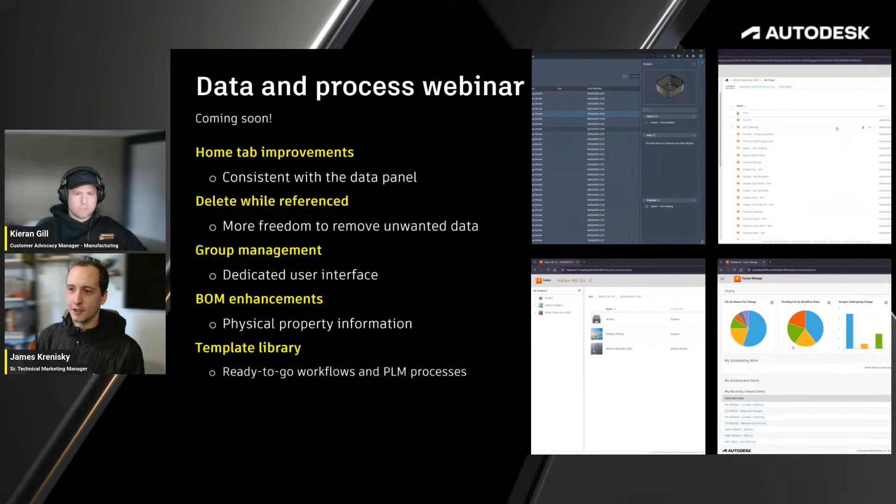Alrighty. So next slide, if you don't mind. I just wanted to say on this release, the highlights are really in consumer product design, multi-axis machining, and multidisciplinary collaboration. There's quite a few updates that aren't going to make it in this presentation or didn't make it in the What's New video. The blog contains all of the release notes, and I highly recommend checking that out. I know there's some updates in electronics that we're not going to get to today that are fantastic and incredibly impactful for a lot of y'all using the electronics workspace.

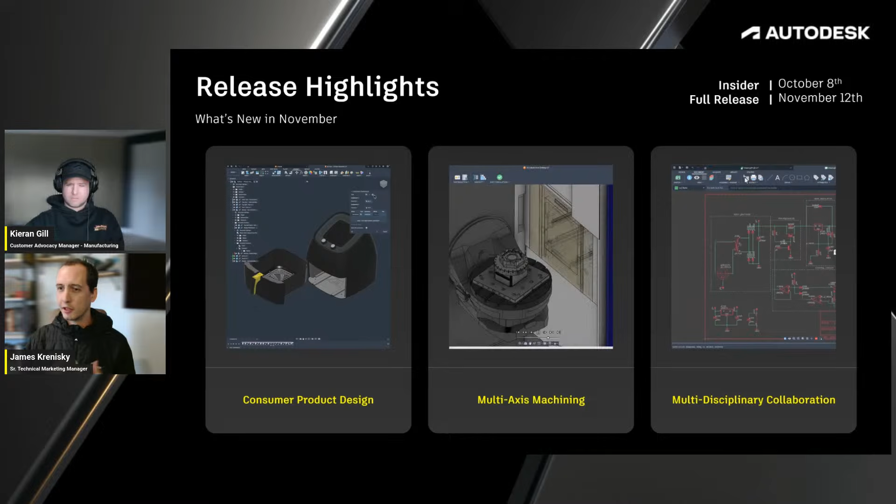But I also just wanted to mention this as a theme more than anything. So you'll see updates in the design side, for instance, on things that help you consumer product designers out there. We really tried to make a focus of adding features that are relevant and impactful for workflows for consumer products this time around.

And speaking of, I just wanted to say this air fryer dataset made its debut maybe a year ago, but we had it on main stage at Autodesk University. We went ahead and took that time to improve it. We added a lot of detailing. We changed the PCB design. We even made a mold design for it, you might have seen.

But I just wanted to put it up here as a flag of we've now uploaded that to the samples folder. So if you want to take a look at it, explore it, maybe critique it if you happen to be an air fryer manufacturer, we'd love to hear your comments. And those types of pieces of feedback really drive these features that we're developing. So let us know.

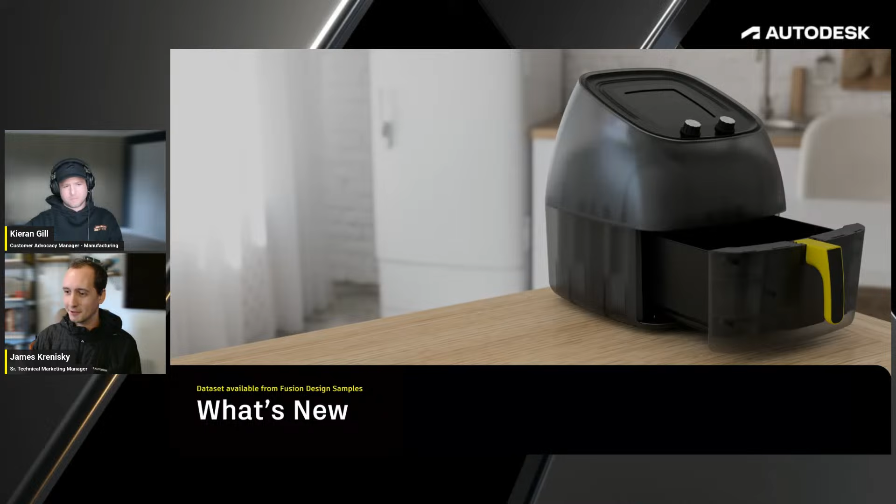Okay, so moving into my expertise, which is really on the design and documentation side. I try and leave Kieran to his manufacturing. I wanted to note something here on the intent-driven design, which I'm sure a lot of you have heard of from the Insider program. This is actually going into public preview later this week. So you'll be able to go into preferences and toggle this on. Everyone will. Later this week, there's going to be kind of a one-off update for some things on the data side, but we're going to include this as well.

And this is actually a really fundamental change slash experiment slash an ask that we've had from the community. It's basically allowing you to start a part, assembly or a hybrid design, which is more of what we imagine as the semi-traditional design style of Fusion. But we're trying this out. I will say it's going to come into full-blown release in some form probably at the beginning of next year sometime. But go check this out. Let us know what you think. And we're actively developing this.

I think it's going to help a lot of users that switch between programs. Like I use Inventor a lot, and I'll sometimes pop into Fusion and I'll say, oh, wait, I didn't make an assembly design because I don't need to. It's just one of those things that if you're bouncing between CAD systems, or I know a lot of you use SolidWorks at work or Fusion at home or vice versa, we're trying to make it easier to transition between. And also it's something that's highly requested and it's been incredibly well received. So all that rambling to say this is coming out later this year or later next year, and to check it out in public preview if you would like to try it out.

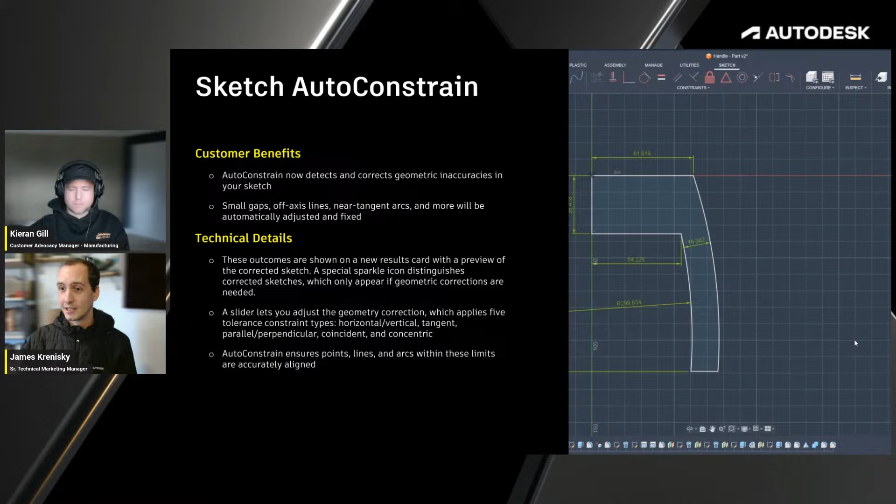Okay, so we're starting off with Sketch AutoConstrain. This has been out for a while now. It's one of the Autodesk AI tools that we know and love, but there's a huge update to it that we're sliding in here, and it's the ability for those sketches to actually be healed. It corrects them. So when you draw a sketch and it's not quite perfect, maybe you have a missing tangent or perpendicular constraint, or maybe there's a gap between the corner points of a sketch, there's a little sparkling icon that you can open up in the AutoConstrain menu and then actually just set it to fix your sketch. So it's like auto constrain gets auto fixing.

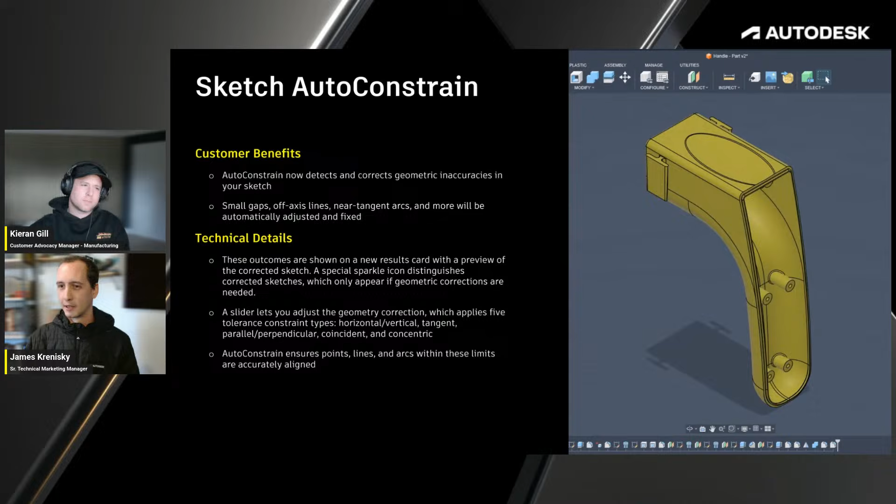And there's tolerances you can add if you don't want it to be, a certain degree of draft angles or something. You don't want it breaking all your draft angles and making them horizontal, vertical pieces. So definitely go check that out. It's really impactful for just speeding up your sketches. If you're like me, I kind of just sketch as I brain dump. So it's helpful to have something to go back and add all those constraints so downstream workflows don't get changed later.

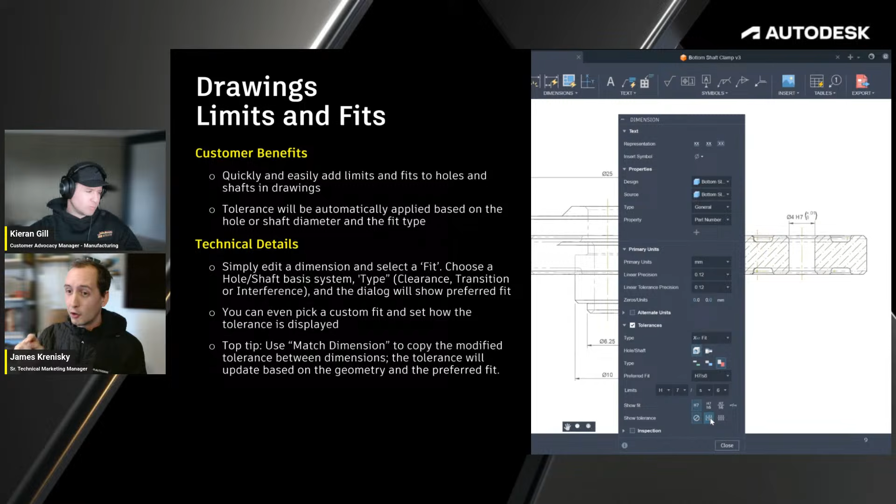I didn't get to fit this one into the YouTube video, so I slid it in here. This is drawing limits and fits, which is amazing. It's pretty advanced for adding tolerances. So like H7 or G6, if you have that precise fitment. My favorite part about this, though, is actually way down the list. And it's almost like a formatter, kind of like the paint tool in PowerPoint or any Microsoft product, I think, where you can format the actual style of that annotation and then put it onto another.

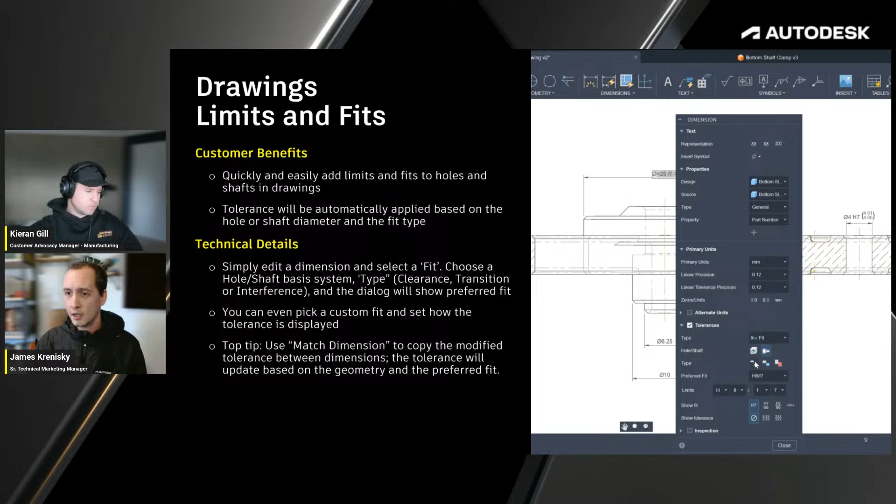So it won't take the exact values like a copy paste, but it will take the formatting, the designations and such, and add all of that to the next one. So definitely check this out. It's really powerful, and I know a lot of folks have also been asking for this. It'll just make your whole documentation a lot more accurate and specific and reusable.

I pattern things all day long, so all of my sketches are atrocious. But I would highly recommend checking this out and let us know what you think. There's performance improvements in every single release of Fusion, and it's something we focus on constantly. But it's hard to make a flashy video for all of these performance improvements. So like I said, I just wanted to sneak it in here because it is really impressive how much they improved this one.

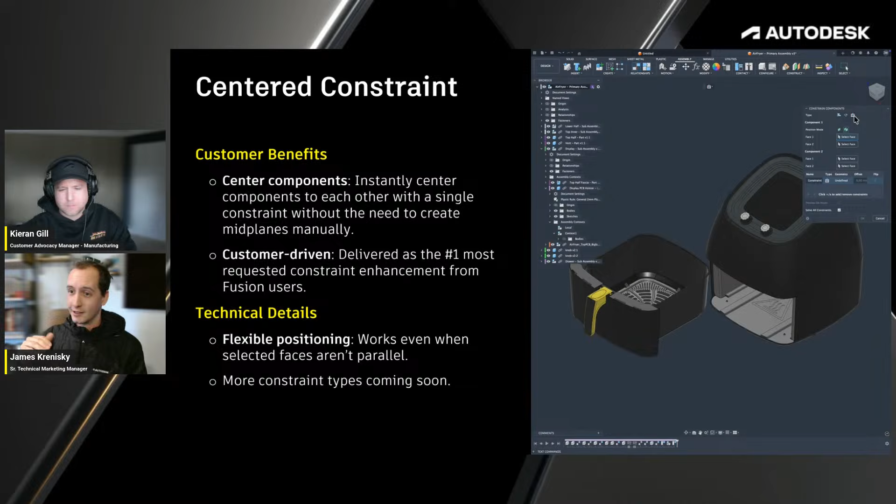So even though this air fryer has draft angles and I think the body is pretty rounded, it has all these kind of strange geometry features, Fusion figures that out for you. And so it'll slap together pretty much exactly what you would imagine. And then using the new constraint assembly experience, you can really just keep on adding until it's perfectly constrained all in one timeline command. I think we all like a tidy timeline, and this is a huge step into that.

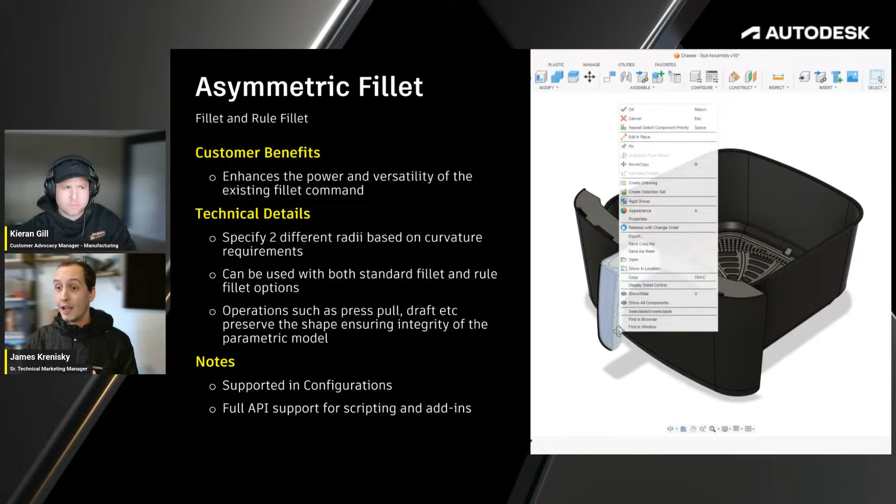Asymmetric fillet. So speaking of consumer products, this is one that's been on the list for ages. This is basically exactly what it sounds like. You can create fillets now, kind of like how the chamfer tool has multiple dimensions. Your fillets can have multiple dimensions, and it gives you a ton of flexibility for how you can actually apply fillets to different edges or faces and what have you.

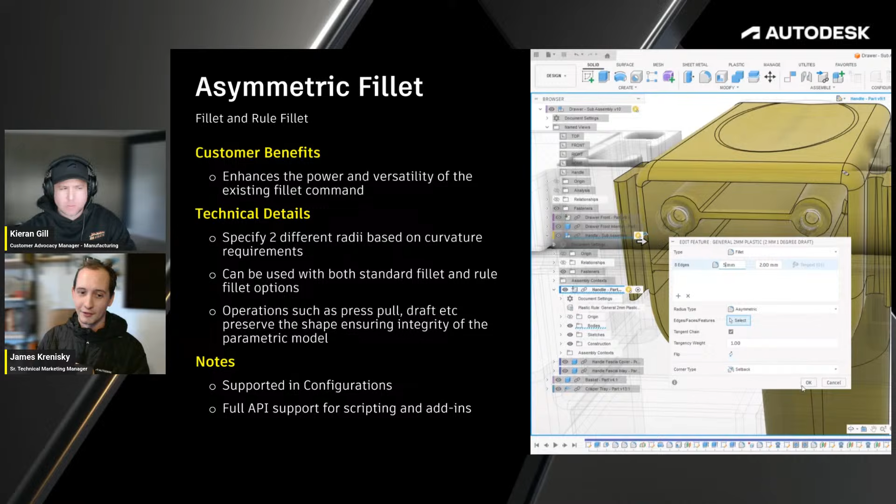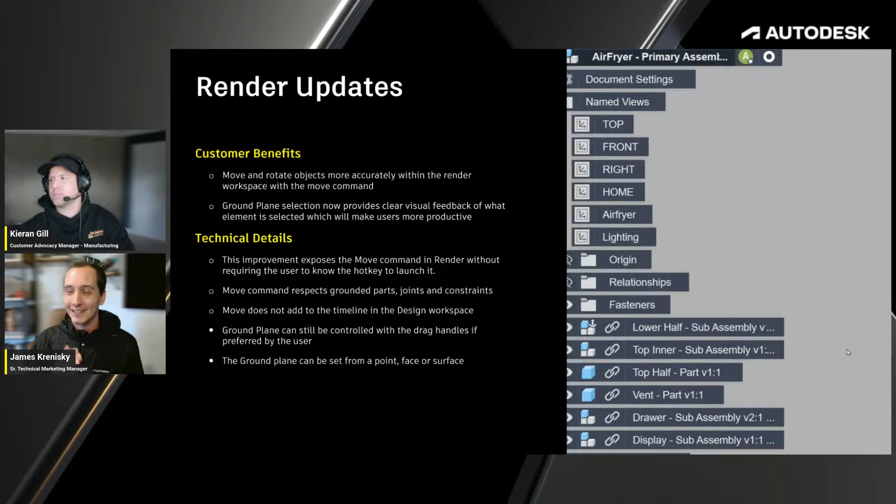Rendering updates. We finally got some great rendering updates for Fusion this release, and I didn't get a chance to sneak it in. The rendering environment in Fusion doesn't get a lot of attention, so we're trying to change that with these next few releases. This is something that's very fundamental, but super helpful if you're doing renders. You can just move those components without needing to move back into the design space. So it's actually incredibly cool to be able to have your shadows and your lighting fall how you would expect.

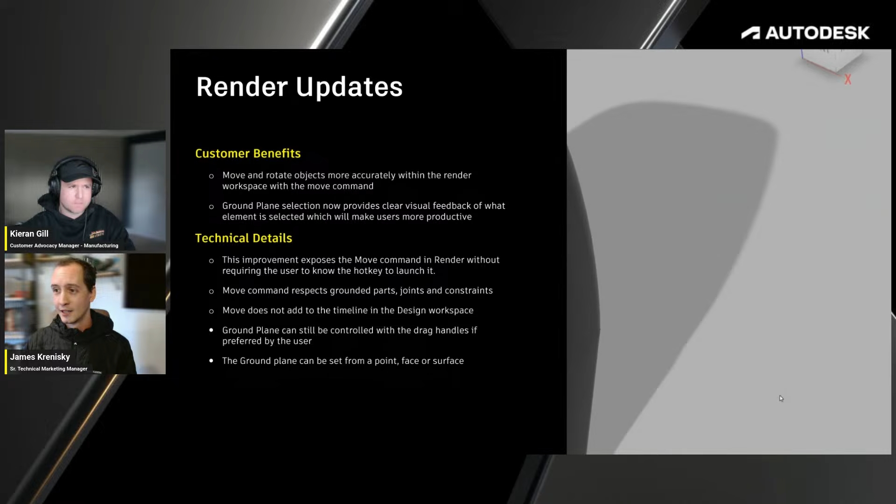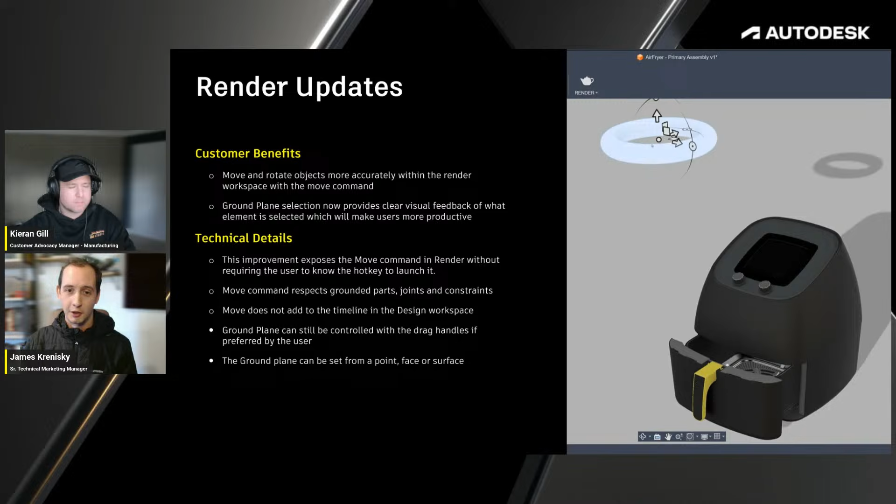A pro tip somebody told me, perhaps James Mann, if you're listening, I think you told me, is to add a gap right between the ground plane and the object, and it makes the shadows beautiful now. So really great to see that. There were some other ground plane improvements that came along with this. So I'm not sure if that has anything to do with it, but that little tip has changed my rendering from very basic to quite advanced looking.

Okay, decal updates. So decals are one of those things in Fusion you either use a ton of or you don't use it. And this is an update for y'all to start using decals in any way that you can, because the improvements are just fantastic this release. The sizing of the decals has been updated to a better interface. You can definitely restretch it to how you need.

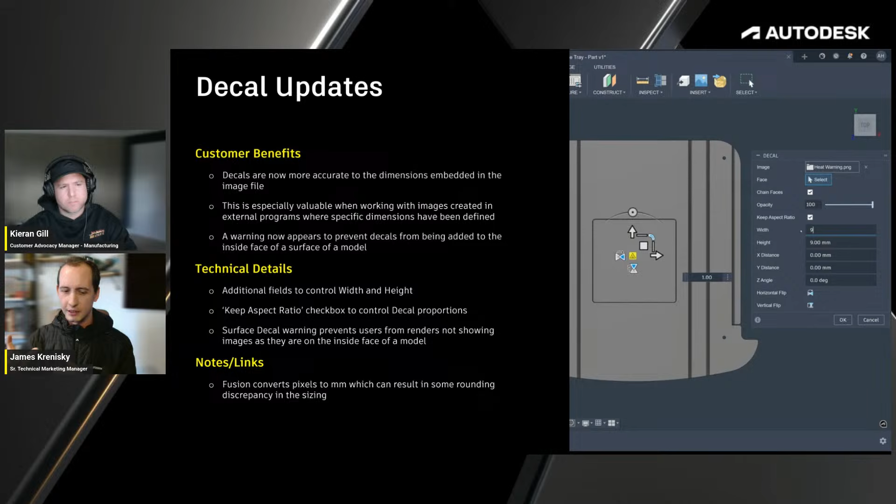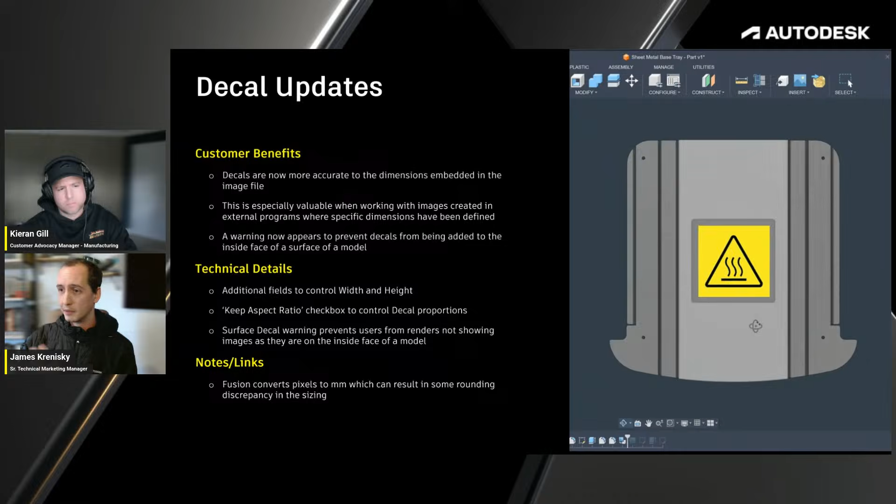And I'll say that sometimes there were some issues with the pixel count coming in. So if you had it at 10 millimeter by 10 millimeter and you brought it in, it wouldn't come in that dimension. So we've resolved that. And if it doesn't for any reason, it can be stretched as needed. I will say there are some rounding anomalies that you should definitely check as well.

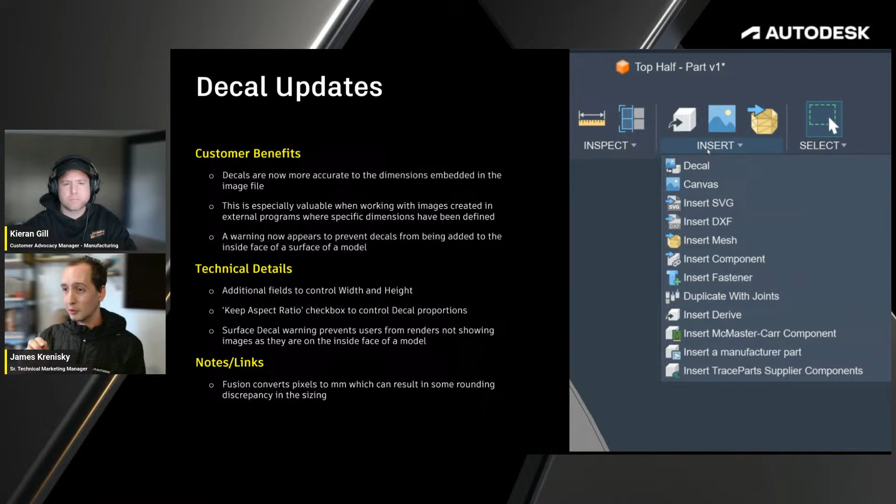And then the big update for this decal tool is that it now notifies you if you accidentally put your decal on the inner face. So it's easy to apply a decal, even though it appears oriented correctly, to basically the incorrect face. So if you go to render it or create documentation, this is kind of a game breaker. So this update allows you to know exactly what face you're putting those on and convert it correctly.

I'm sorry if I'm speeding through these. We had a lot of them, and I know Kieran has a bunch as well.

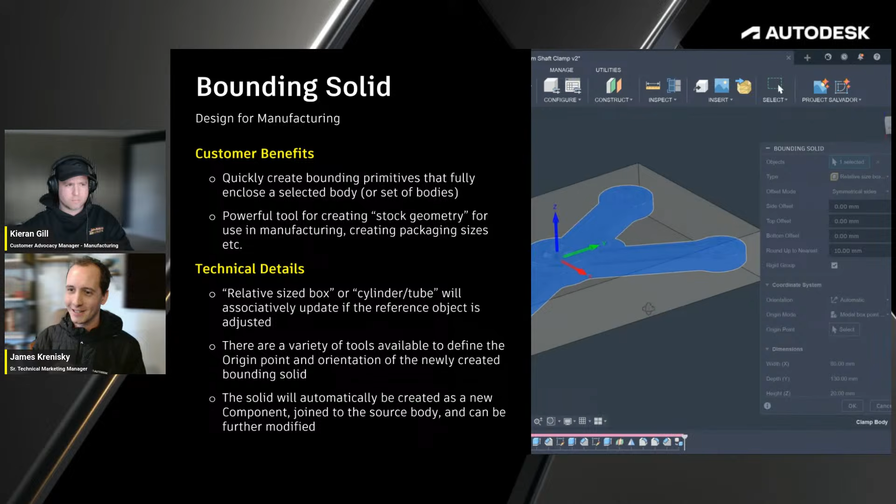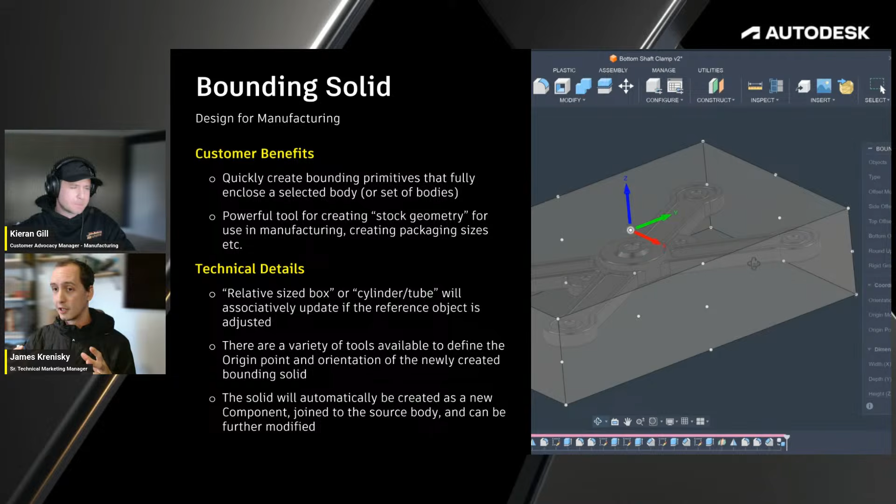So bounding solids. This is one of those that is a great bridge between manufacturing and the design space, but you can quickly create those bounding boxes. It fully encloses your selected bodies, but also creates that timeline feature, so you can go back and do parametric changes. This is cylinder and rectangular prism basically now. It associatively updates, and it can be used on a set of objects as well as an individual one. So definitely give this a try.

I know a lot of you have stock, which you can use this tool for, and that stock can also be edited with different features. So if you're fitting it into a vise or some type of machine specifically, you can add those features into that body as well.

And I think that might be my last feature before I hand it over to Kieran. Sorry if I flew through that. Let me know if there's any other questions in the comments there. Super duper. Thank you, James. Can everyone hear me okay? Super. Yep, sounds great. Great.

So let's focus on manufacturing. We've got a lot to get through. I've actually got a few demonstrations I would like to walk you through in Fusion as well. So let's jump straight in. Now, the first one really for the November release is what we are calling a user coordinate system, or UCS. The UCS is a general tool for defining coordinate systems in Fusion, particularly for horizontal end-to-end workflows using other workspaces as well as design.

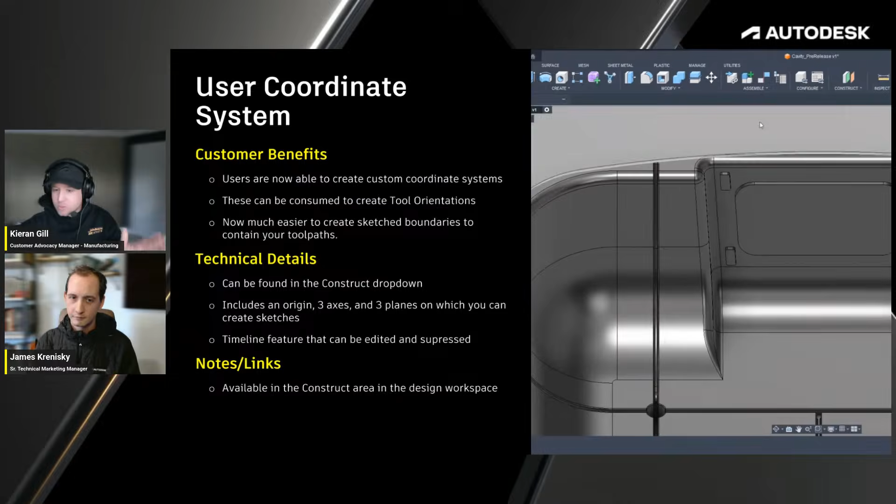Now, the common application for this bit of technology is for 5-axis machining, where you may need to define a tool orientation and sketch a 2D toolpath boundary aligned with that tool orientation. Previously, this has been difficult, cumbersome, and problematic, but you can now use the design workspace to very easily create a user coordinate system and use the XY reference plane to create a sketch.

Now, within the manufacturing workspace, you can consume that UCS to define any tool orientation and select the sketch to define the toolpath boundary. It's never been easier, and the video really gives you a good idea of what that capability looks like, but also the power of that capability and what it brings going forward to the manufacturing environment.

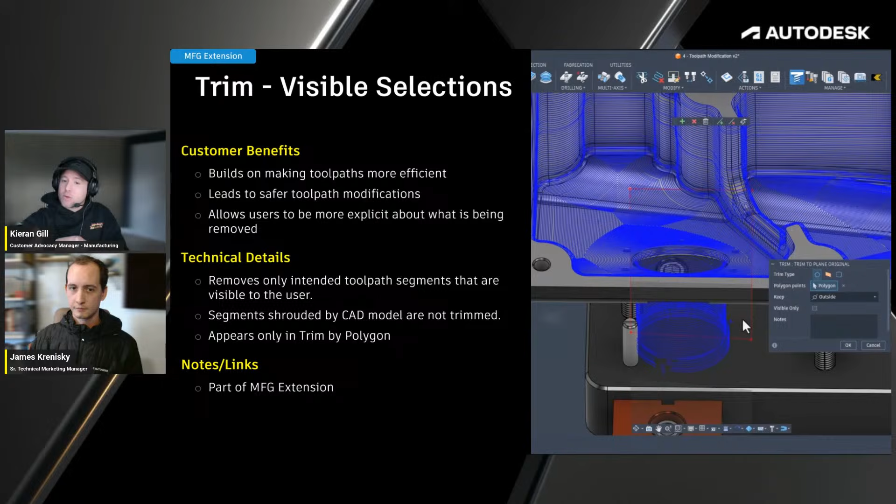Okay, then on to trimming of visible selections. Now, part of the problem when applying the trim modifications to toolpaths using a polygon, using the Manufacturing Extension, meant that toolpaths on the other side of a bit of geometry could often get caught by the cookie cutter effect. So you not only trim the area you want, but you also unknowingly trim other portions of your toolpath, making for potentially dangerous cutting conditions.

So not ideal. So with the November update, you can now choose to project the polygon onto the nearby surface instead of through the entire part. In this projection, only the visible selections of the toolpath within the polygon are considered to be quote unquote inside, and the rest of the toolpath is considered outside.

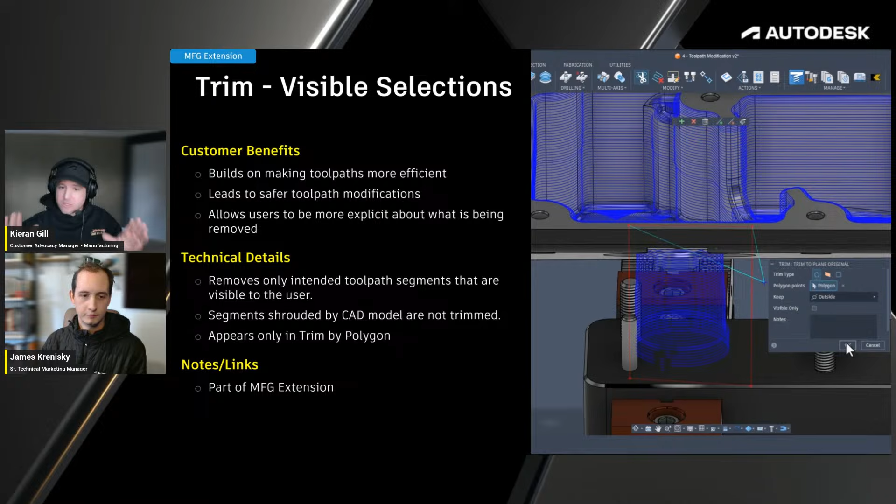This makes it far easier to make modifications more precisely, making changes where they are required more explicitly and avoiding changes elsewhere. All you simply need to do is check the visible areas only checkbox to make sure you are not trimming the wrong bits of your toolpath.

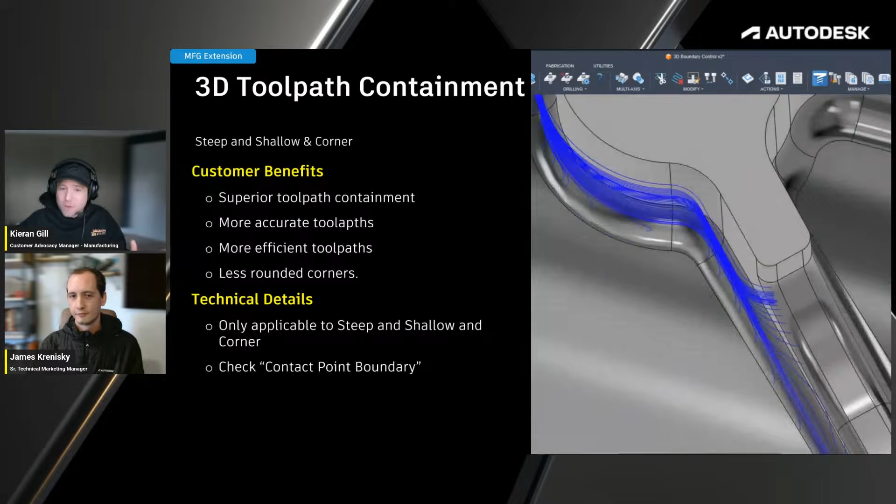Okay, then onto 3D toolpath containment. Now, have you ever wondered why sometimes steep and shallow and corner would sometimes bleed outside of the boundary that you created? Well, to give you a bit of context here, the real reason lies in how the toolpaths were consuming boundaries.

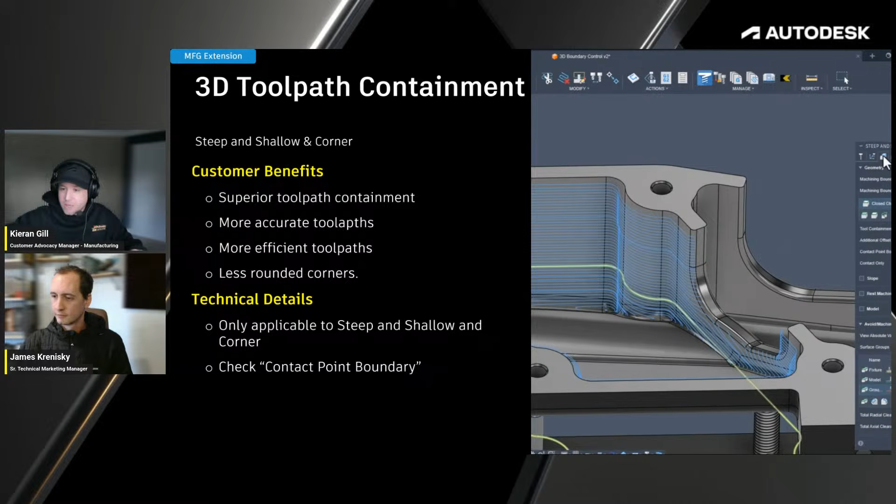Essentially, what's going on is that due to the nature of those toolpaths being born from PowerMill, they have always enjoyed the ability to consume 3D boundaries. Bringing that tech into Fusion meant that we had to essentially flatten the 3D boundary into a 2D boundary. This meant a less than ideal situation where the toolpath would sometimes bleed out of that boundary, especially when you had steps in vertical orientations, for example, which 2D boundaries just didn't deal with as well.

So that's all changed with the November release. When using the steep and shallow or corner strategy now, the toolpath is confined on vertical surfaces much more accurately when using the machining boundary selection as a contact point boundary. You will now also see that when checking the contact point boundary, the boundary stays in 3D now and respects those vertical areas much more accurately.

Ultimately, what does this all mean for customers and yourselves? It simply means there's less tool rollover on defined boundaries, more accurate toolpath containment, and just a much more accurate toolpath going forwards.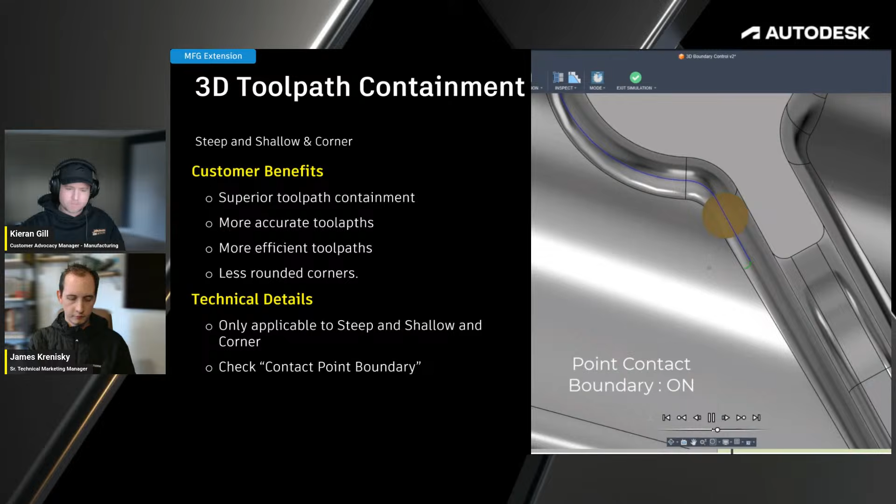Okay, so multi-axis drilling. This is a pretty big one. If you haven't already guessed it, we've added multi-axis capabilities to drilling operations, exposing the multi-axis tab with 3 new machining types to drilling. Those are polar, 4-axis, and 5-axis. So there's quite a lot to unpack here, so if you do want to take notes, feel free to do so.

With respect to polar, what this does is it adds polar linking functionality to the drilling operations while maintaining cycle output for the cutting moves. This can enable you to stay within those machining limits where necessary.

On 4-axis drilling, the controls allow you to define a rotary axis whereby the holes to be machined will generally be perpendicular to the rotational axis. You also have controls to specify whether the hole axis should intersect with the rotary axis, for example on holes on a cylinder, or whether they can be shifted in the perpendicular plane. A good example here would be holes on a cuboid shape around a rotary axis.

And additionally, there is also a control to specify a tilt angle, in which case the machined holes will be tilted away from the plane perpendicular to the rotary axis in a 4+1 fashion.

Now, lastly, in 5-axis, the operation will machine the holes in full 5-axis, respecting the axis limits defined. You can apply a maximum as well as a minimum tilt angle with respect to a tool axis reference, as is common in other multi-axis milling strategies today, of course.

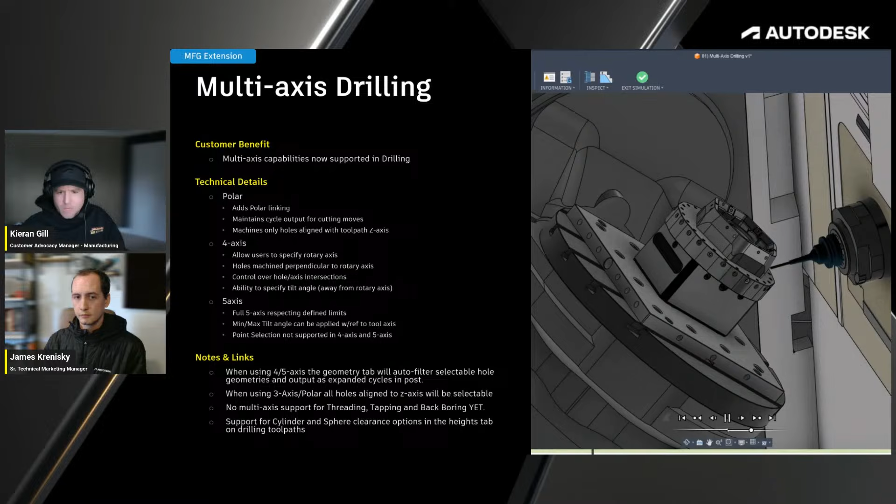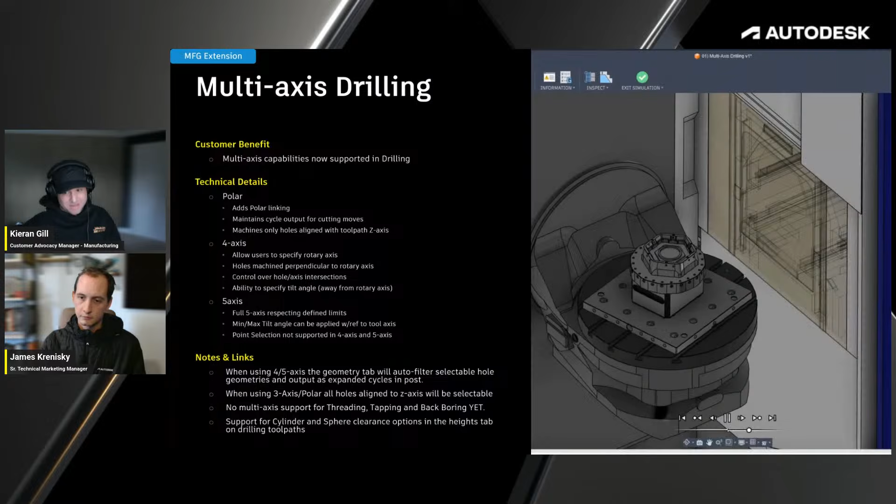And then probably the big call out here is that all toolpaths with machining types set to 4 and 5 axis will be output as expanded cycles in the post rather than canned cycles. What this means is that there is no direct synchronization between the spindle and the feed rate. So ultimately, things like threading and tapping operations do not yet have multi-axis support. And I mean yet. Similarly, back boring does not have multi-axis support yet either.

Okay, so let's move on to machine over holes or pockets now, and we'll dive into a demonstration of this very shortly. Up until now, the ability to machine over holes and pockets was only supported realistically by geodesic toolpaths and flat toolpaths through a tick box on the passes tab.

Users have been able to get around that by creating capping surfaces and including them in their machine avoid selections for all other toolpaths. This functionality, as I mentioned, is supported currently in geodesic and flat, and we've now extended that to work for all 3D toolpaths that support machine avoid capabilities.

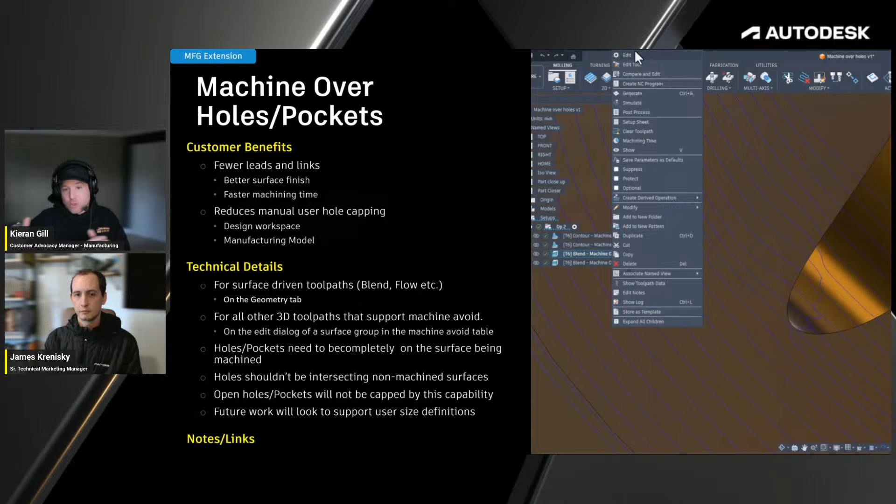Now, how you access this capability is slightly different depending on the toolpath you are using, so it's probably worth paying attention to this. For surface-driven toolpaths, things like blend, flow, geodesic, the tick box can be found on the geometry tab in the geometry section. For all other toolpaths, it's found on the edit form of a surface group in the machine avoid surfaces table. So ultimately, slightly different access methods, just something to be aware of there.

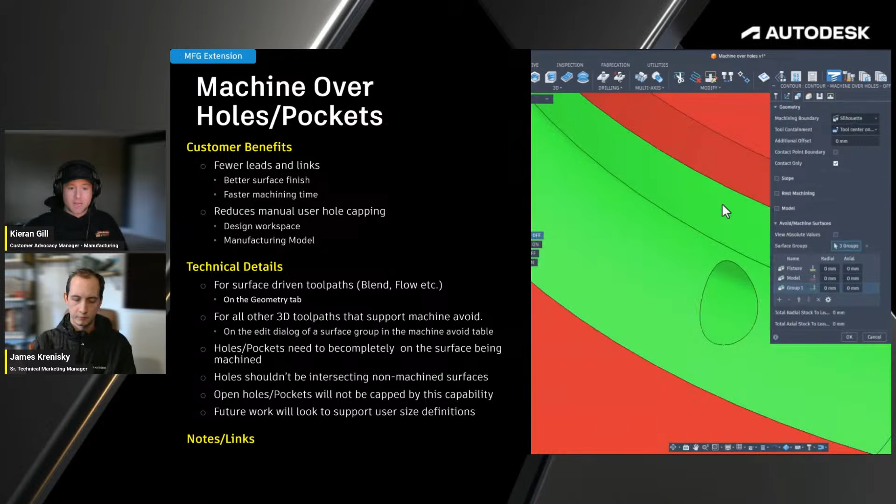Ticking the box, however, in both cases means that all surfaces in the surface group or the drive surface group will be automatically capped or untrimmed behind the scenes. And that means that any holes or pockets in these surfaces will automatically be machined over by the toolpath without the need for the user to go in and create additional capping surfaces downstream or upstream. So some real powerful workflows there to help you automate these toolpaths from ducking into those unnecessary holes.

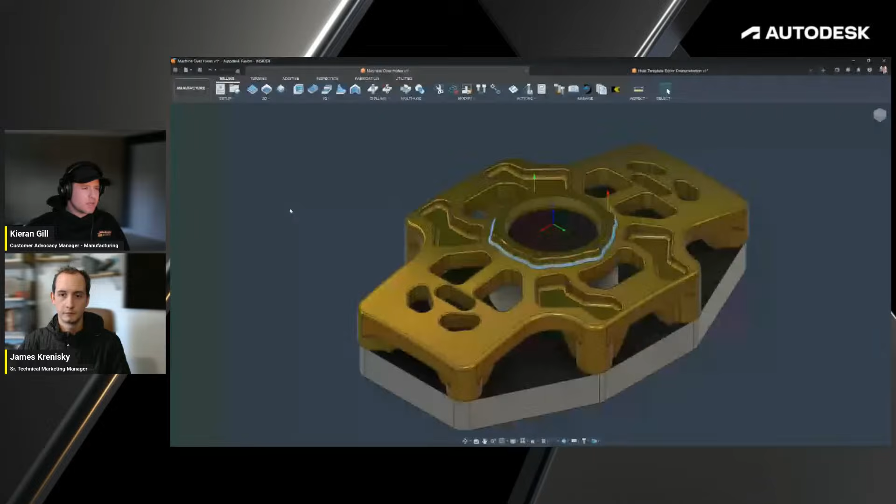Okay, so with that, let's just stop sharing for a minute, and I will share Fusion. So I shall stop sharing and I'll reshare my screen. We'll just have a look at what that looks like in practice. So let me just grab the right screen here for everyone. Can everyone see my Fusion screen at all? Yes. Okay, everyone can see the screen.

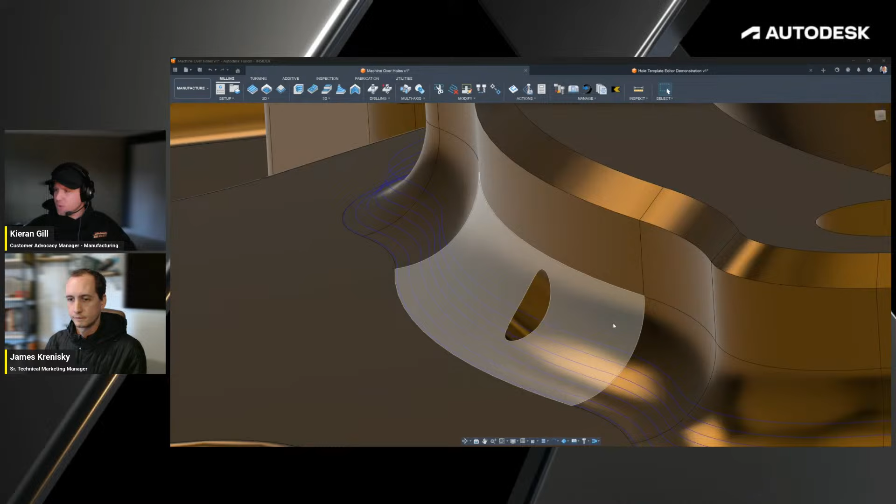Okay, so on the screen, we've got a simple part. Now, we've got two different toolpaths here. We've got a blend toolpath and a steep and shallow toolpath. Let's first look at the blend strategy and have a closer look at this. Now, on the surface of this, it looks as if the toolpath is actually looking quite good. But if I zoom in, you can actually see that the toolpath is ducking into that hole, creating unnecessary tool engagement in potentially a lot of stock.

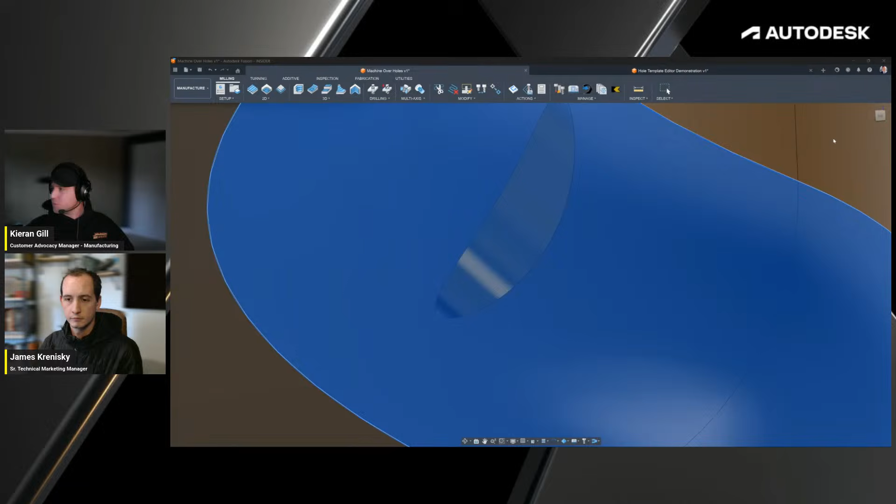This is potentially fatal for the tool, could damage the machine tool, and this is just something that we want to avoid. With the option turned on, you can see the toolpath just simply glides over that hole entirely. So for blend style toolpaths, which are surface driven toolpaths, the way you access the ability to machine over holes is to enable the machine over holes option within the geometry tab. Okay, so similarly, once that is activated, you can see the toolpath just simply avoids the hole.

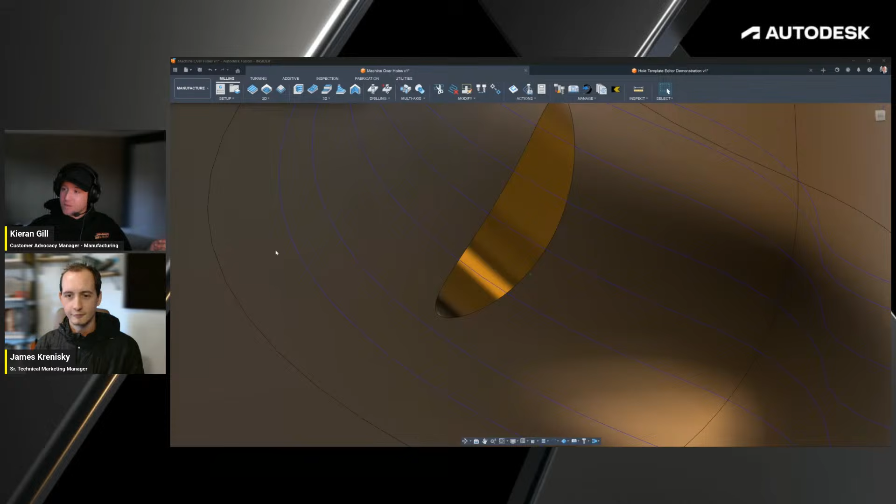Let's now look at steep and shallow. Now, again, an undesirable effect here of the toolpath ducking into that hole. You can clearly see the kink of that toolpath ducking into that hole. So this is obviously something we want to avoid. And again, let's turn that functionality on, and you can clearly see with steep and shallow how it just simply glides over that hole. Now, with steep and shallow, this is slightly differently accessed to some of the other toolpaths.

So for example, here in your machine avoid option, you can edit that machine avoid group. And within the actual faces that you are choosing to machine, you can enable the machine over holes functionality. So just to recap, two different methods for invoking machine over holes. For surface-based toolpaths like Blend, Flow, and Geodesic, you will access that from the Geometry tab. For other toolpaths, it is found on the surface group in the machine avoid table.

Okay, so I will quickly stop sharing again, and we'll just very quickly jump back into the presentation. So let's go over here. And let me know when you can see my screen.

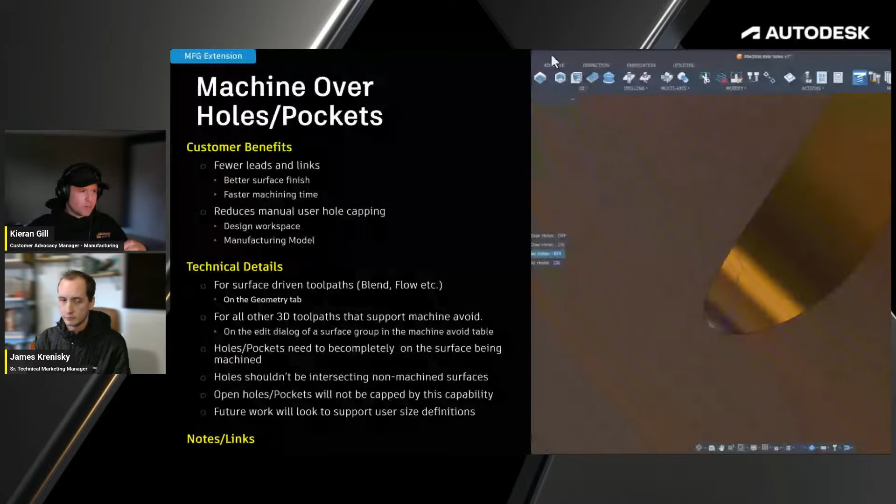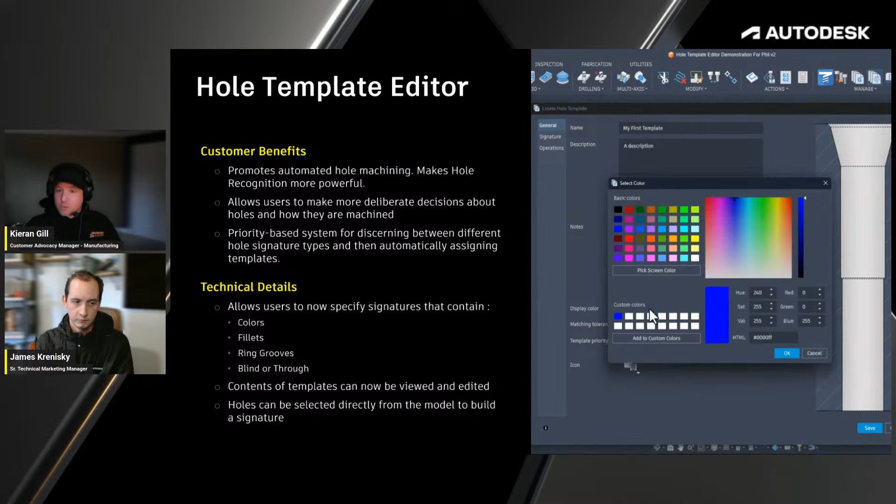Right, so that is machine over pockets. And let's now jump into the hole template editor. Now, I think this is pretty much a revelation in empowering you to automate your hole machining in Fusion going forwards. So you're probably thinking, but hang on, why is Autodesk introducing a hole template editor when we already have the ability to apply templates and we already have hole recognition? Well, there are five big problems why we are introducing the hole template editor. Bear with me as I go on a rant here to walk you through why we've done what we've done.

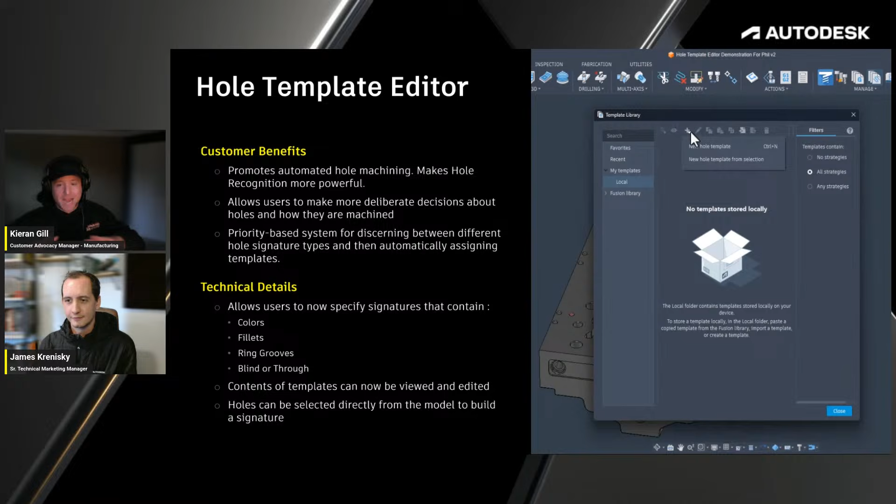The first problem is that hole recognition today has no concept of dimensional scrutiny for selecting a template. So imagine two counterbore holes, one very large and one very small. Hole recognition will recognize them both as a counterbore and show you all the templates that are associated to those counterbores. There's no concept of specifying templates based on the dimensions for any of those given features. The user still needs to hit the drop down and pick a template from the list.

It's not very automated. The second problem is that hole recognition templates only apply standard drilling to holes containing cylinders and cones. If that hole signature contains a fillet or even a groove ring for inserting something like an O-ring anywhere in that signature, you might as well throw all your hard-earned money into your nearest wishing well, because hole recognition sets the signature to ignore with no option to change it to anything else.

Generally, to get around this, holes that have fillets or anything else other than a cylinder or cone, you could simply delete the fillet from the CAD, create a template for your hole, and then drill with a much smaller drill and come ramping down the hole to add in that fillet later with something like a bull nose. Talk about a nightmare. So that's the second problem.

The third problem really is that most users will, generally speaking, import data from a third-party CAD software into Fusion as they transition over to Fusion. Now, the problem therein is that if it's a STEP file or a Parasolid file, we lose all the hole data like hole type, thread info, and tolerances. Now, designers often communicate what type of hole it is and how it should be manufactured. So sometimes the designer will purposefully create holes with incorrect dimensions so that it can be identified as a cooling channel, maybe a water channel, maybe even a sprue bush hole, whatever.

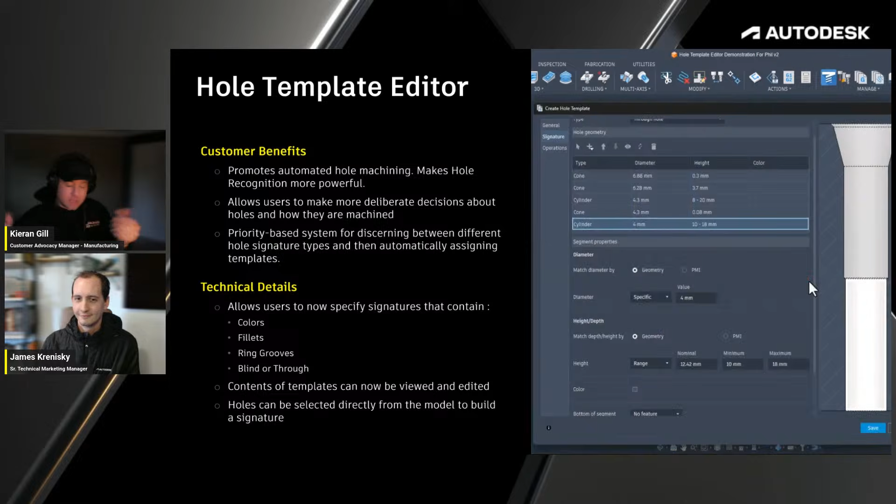Problem number 4 is hole recognition today contains the ability to apply templates and the idea that one can share those templates across the factory floor. Great in principle. You could share it across teams, across organizations, and it provides a nice comfort blanket so that conformity of accuracy is achieved when drilling is standardized across the company. Sounds all good in practice. Generally, it'll be the drilling guy, the drilling maestro, the drilling guru that simply creates the templates and sends them to all of the colleagues.

So today with hole recognition, when the colleague receives that file from the guru, all they have is a short name of that template. The template can't be looked at in any great detail. It can't be opened to see what toolpaths are inside that template, what settings are inside these toolpaths, or what decisions were made to help create that template in the first place. The only thing a colleague can really do is generate some dummy toolpaths from it and have a look at them. Essentially, users have been going on blind trust that the person who created the templates knew what they were doing. So call me cynical, call me glass half empty, but I'm not sure I trust that workflow myself.

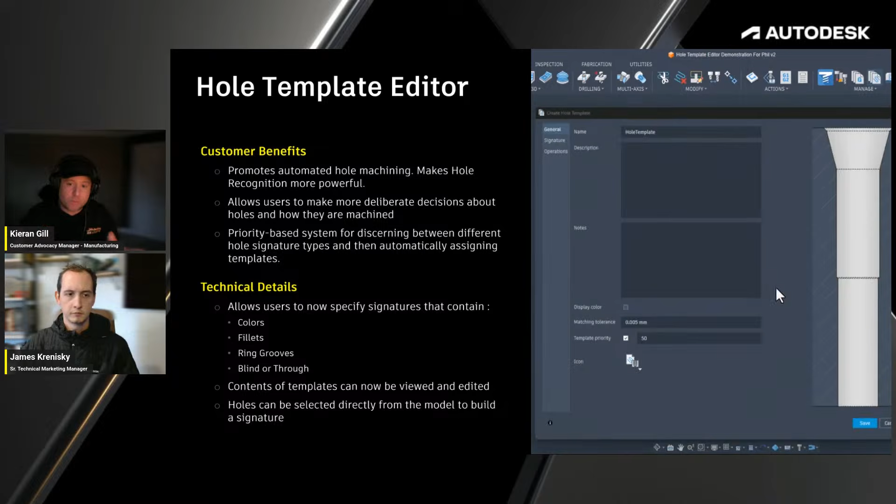And then last but not least is problem number 5. Today, users will have a very specific tool diameter or tool name in a template for general use and not for a specific job use. Say, for example, they want to use a specific drilling tool diameter to match a specific threading process, like either a cut thread or a form thread. You just can't do that in hole recognition today. Hole recognition doesn't store tool diameters or tool names. It stores the tool as a percentage of the hole diameter.

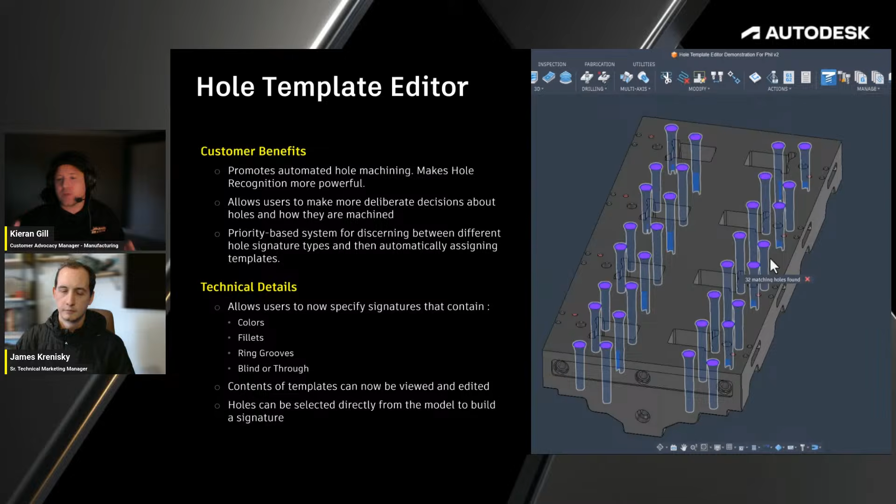So a real good example is here. Take two holes where you are machining an M6 or an M10, and you have two tapped holes of differing sizes. The current solution is going to give you an incorrect answer for at least one of them, perhaps more likely for both hole types, leading to suboptimal drilling or tapping and not what you wanted in the first place.

So we need to be able to provide customers with a method of specifying a very specific tool or a very specific tool diameter for a specific hole type. So what I'd like to do now is to jump back to Fusion to show you the solution we have created in order to address these problems. Now, we will come back to the slide again, just to kind of recap on it all. So don't fear, we will come back.

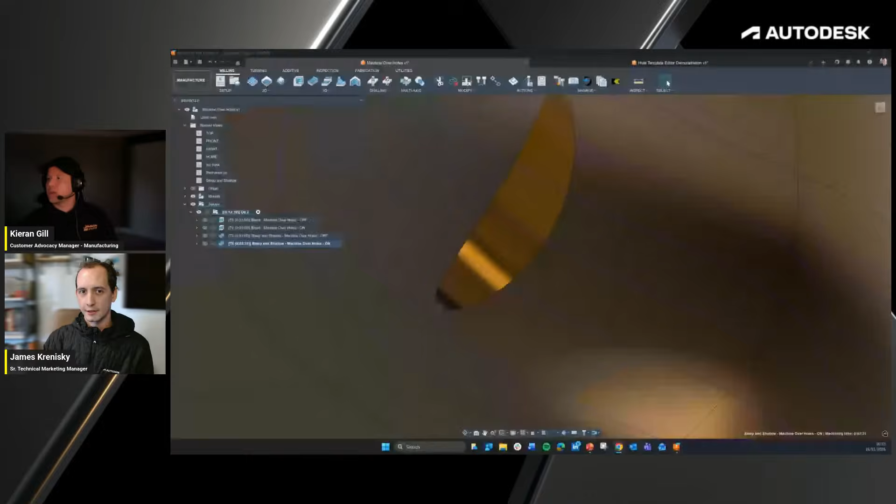Okay, so let's jump into Fusion. Let me just stop sharing again and share my Fusion screen. Hey, Kieran, if possible, can you share your entire screen? Because last time the dialog boxes didn't pop up when we were in the demo. Right, no problem, let me do that for us. Share screen. And let's go entire screen, and let's go this one. And you just let me know, James, when you can see that okay. Yeah, let's take a gander. Yep, we can see your whole screen. We can see Fusion in there.

Okay, brilliant. So sorry about that little technical issue, but hopefully the GIF in the previous image for the machine over holes, machine over pockets highlighted the fact where you can see those two options in order to do machine over holes for each of those different tools.

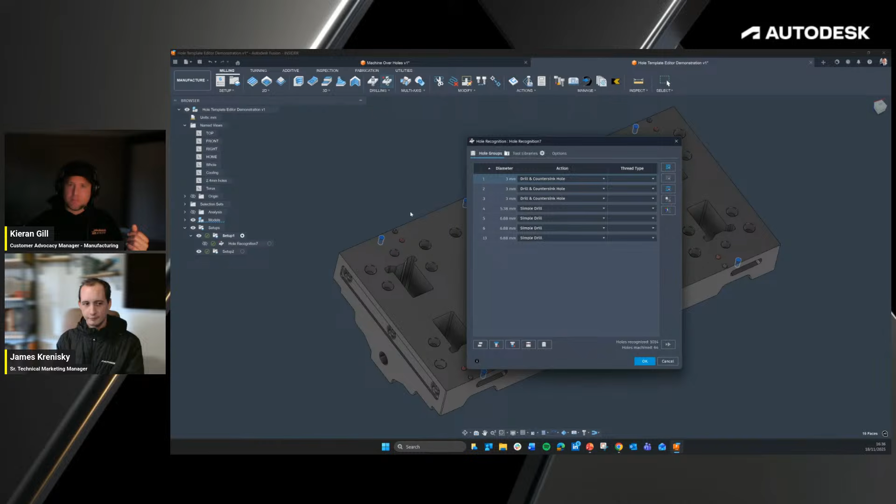Brilliant. Okay, so on the screen, what we've got is a whole bunch of holes. Now, I don't really know the depths of them. I don't really know the sizes of them. But what we're going to do is go into hole recognition. We're just going to see what sort of holes we have given to us or being detected. Okay, so the first thing we're going to do is move this little dialog box to the side. James, can you see the dialog box okay?

Great. Okay, so we've got a whole bunch of 3 millimeter holes, and we'll zoom into it a little bit, but there is some color that's been denoted on some of these holes as well. So that could be denoting either a water cooling channel, maybe a sprue bush channel, it just depends. We've got some 5, 6.8 millimeter holes and some more individual 6.8 millimeter holes.

Now I'm just going to go ahead, just for the time being, to get some blank toolpaths on the screen. We're going to select these two and get some simple drilling toolpaths on the screen, so we can start playing around with our hole template editor. Okay, so once we have some toolpaths created, you can see they're spot drilled, and then subsequent increase in drill sizes.

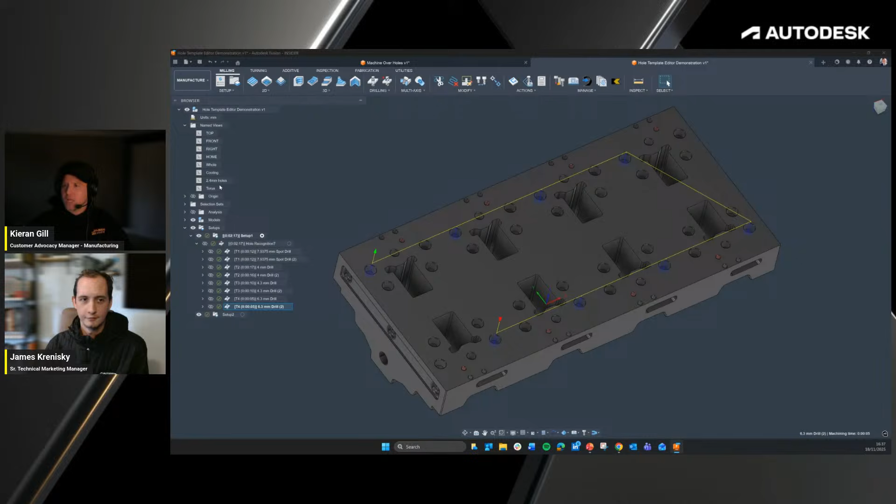Now, let's just zoom into the channels a little bit, and we'll isolate this because they're effectively all the same all the way around. Now, in theory, to create a template today, I could individually highlight each of these toolpaths, right-click and say, store as a hole template. But I'm not going to do that.

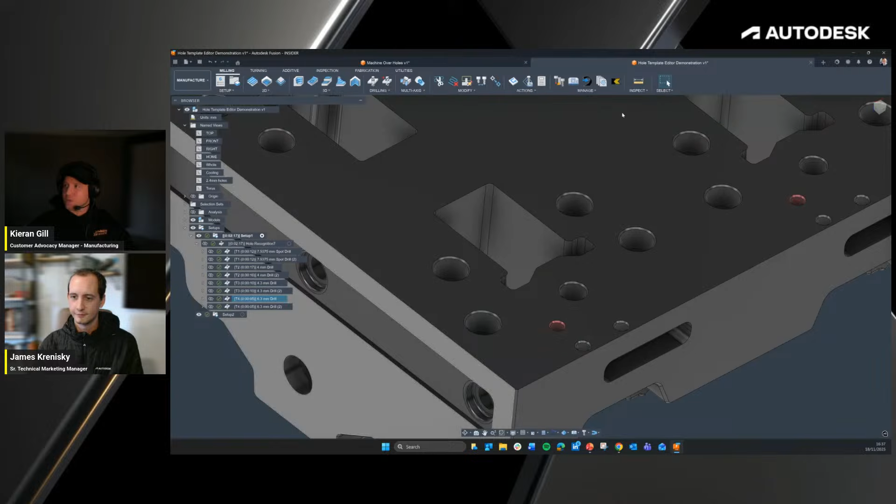What I'm going to do is go to my template library, and within template library, I'm going to hit the plus option, and there are two new options called new hole template and new hole template from selection. And now I'm going to hover my mouse over some of the geometry on the part. And as you can see, I can highlight some geometry around the part as I navigate.

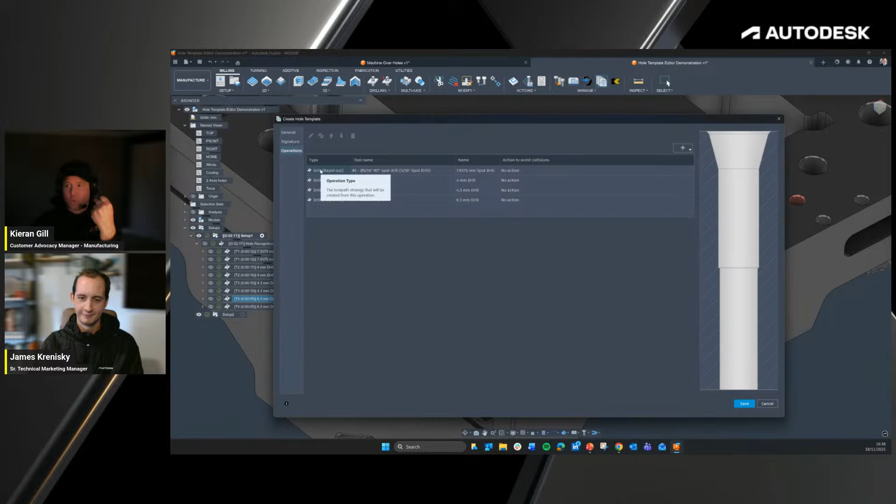But as I move over a bit of geometry that already has toolpaths associated to it, I can click that geometry. It highlights the toolpaths in the browser. I can click the green tick. And importantly, what it does is it consumes the entirety of the hole signature into the template. I can see the segments highlighted not only in the table, but in the little 2D cross section on the right-hand side when you select them. But more importantly, it also imports the toolpaths associated to that particular hole signature.

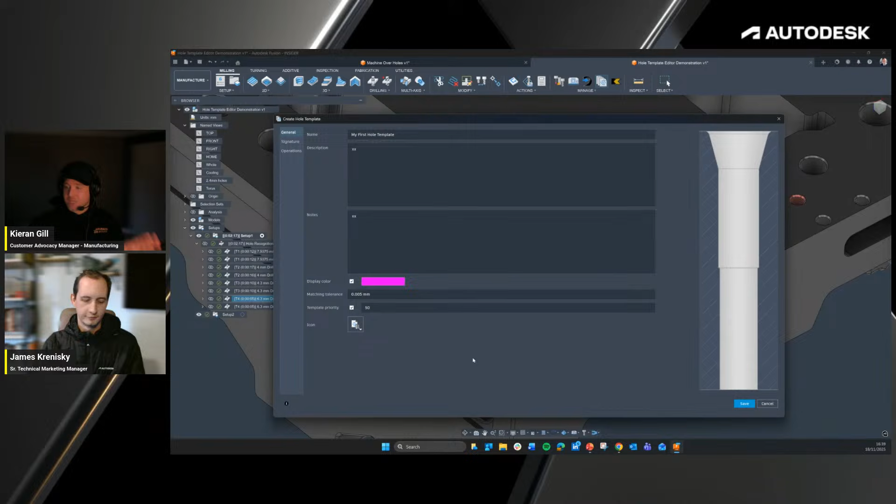Okay, so let's jump back and let's just quickly fill this out. So let's go with something like my first hole template before we get a little bit more complicated. We can give this a simple description. But what we have the ability to do now is the ability to color hole geometries as well when they get identified by a particular template.

Now for this, I've pulled in all of the correct geometry. I'm quite happy with that. I've got all of my toolpaths because we just created them from scratch. You could have your toolpaths already created. We're going to go ahead and save our first hole template. Okay, now I'm simply going to go ahead and hit delete.

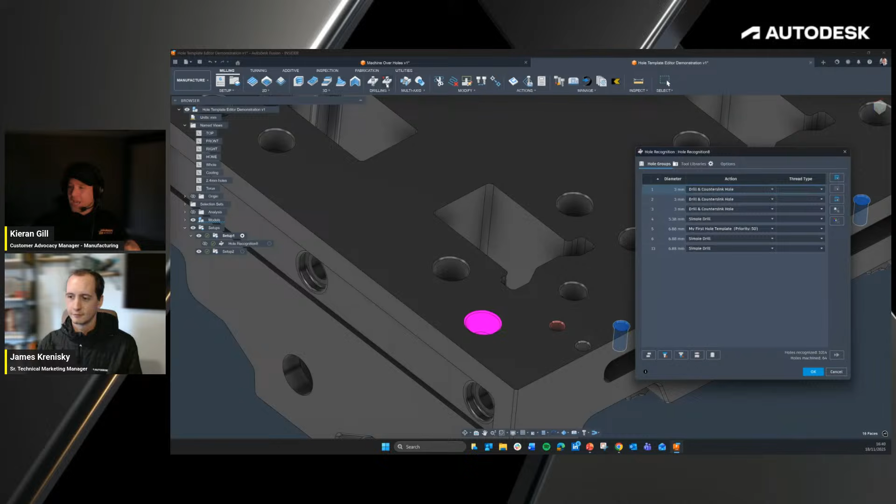And what we're going to do is we're going to go back into hole recognition. And we should, in theory, now see that some of the holes are automatically colored and detected as that pink color. Now, if we look back at the part as a whole, we can see there are quite a number of hole geometries which we can equally machine with this template, and maybe prudent to machine with this template as well.

So I can now go into my template editor. I can edit that template. And what we can begin to do is look to potentially loosen up this template to incorporate other hole geometries as well. So for example, I could now go to my height tab and say, right, what I'm looking for here is a range of heights from 10 to, for example, 20 millimeters.

Now it's interesting because at this point, you don't really know what is going to be identified by the hole template or hole recognition going forward. But fortunately, there's a really nice tool here called the little eye or the preview matching holes. If you go ahead and select this, it'll give you a preview of some of the holes it's already detected. Now, I haven't gone far enough. It's still picking up those original 8 holes. So hitting the X, we do need to loosen this up again.

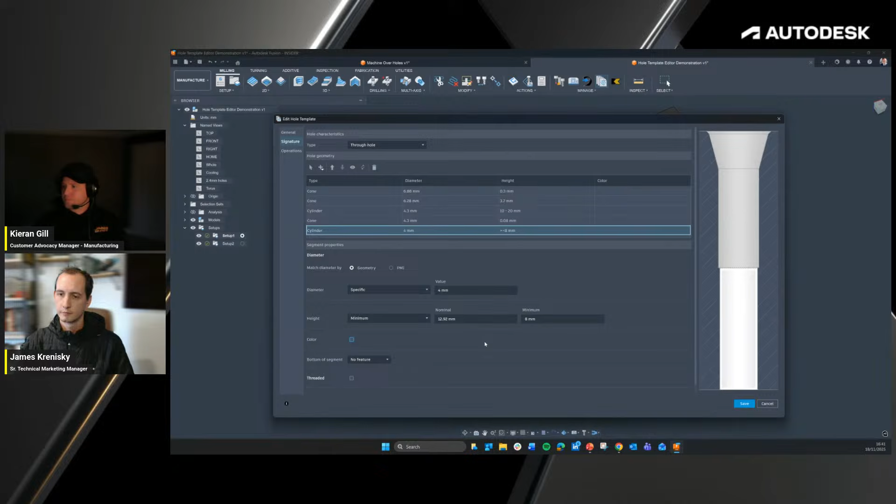So again, I can come in and pick on my second bit of geometry in my signature. And let's pick, for example, a minimum height, and let's specify something like 8 millimeters. Okay, now that we've got that, let's go ahead and click on Save. Let's close that dialog box, and let's rerun hole recognition. So in theory now, we should see all 32 holes beautifully identified by that template that we created.

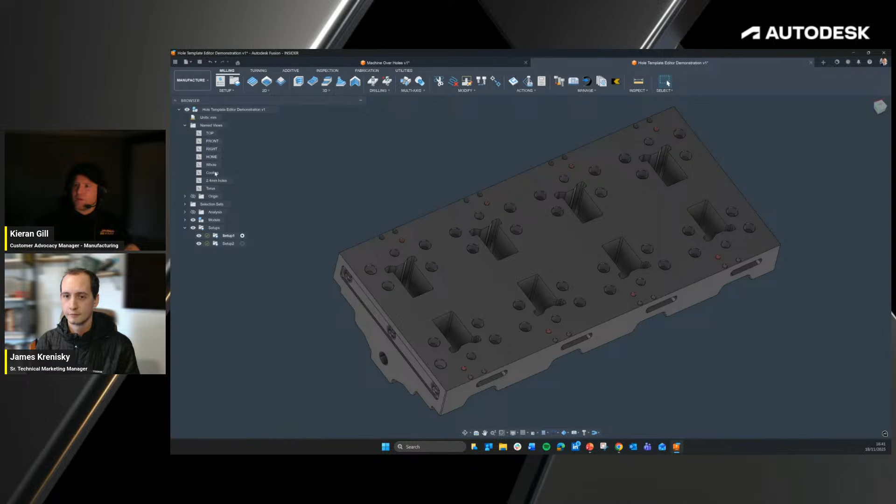Okay, so let's have a look at those cooling channels again. You can see there's those 32 holes that we identified, but the smaller of those cooling channels, we could use the template to do so, but it's probably not going to be efficient. So what I'm going to do is take this original toolpath, and simply go ahead and duplicate that toolpath or that template.

Double click on it, and let's call this, for example, my first small hole template. Okay, again, we can leave the description and notes exactly the same, but let's give this, I don't know, a cyan color, for example. Now, because we've duplicated it, it's using the geometry or the actual hole signature from the original bigger holes. So I can use this little select a hole from the model option to overwrite the hole geometry from the canvas with the new geometry.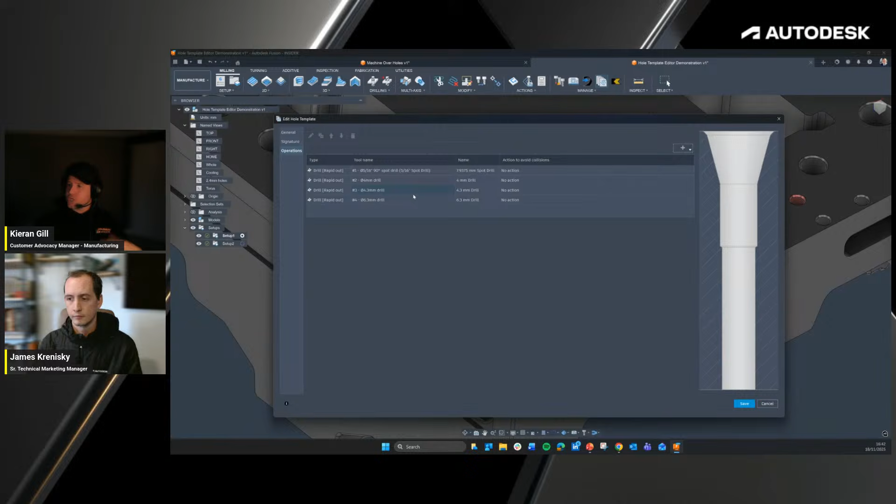Additionally, I can now go into my toolpaths and say, actually, I don't need the 4mm drill anymore. I need to open up the operation itself, and pick, for example, if I just bring that dialog across for you there, it just opened on the wrong screen. I can now go ahead, for example, and pick a much smaller drill. But there's much more intelligence built into this. I don't just need to specify a specific tool.

I can use a search mechanism within the actual drilling dialog to get the best tool out of my entire library, whether that's selecting a specific diameter, a min-max diameter, a % of the tool to hole diameter ratio, a min-max tool to hole diameter ratio, or a core drill or tap thread size tool as well. You have all the options to tell the toolpath dialog to search through your entire tool library and pick the most appropriate tool given your constraints.

Okay, so in this case, I'm just going to be very specific. I'm going to go ahead and, for example, pick the 2.4mm tool. Here it is. Got it. Pick it. And again, what we've done as well with all drilling toolpaths is provided collision detection and collision avoidance. So within flute, shaft, and holder, you can now automatically identify collisions and avoid them, as well as within the linking tab, have the ability to avoid collisions on all linking moves as well, should you want to do so.

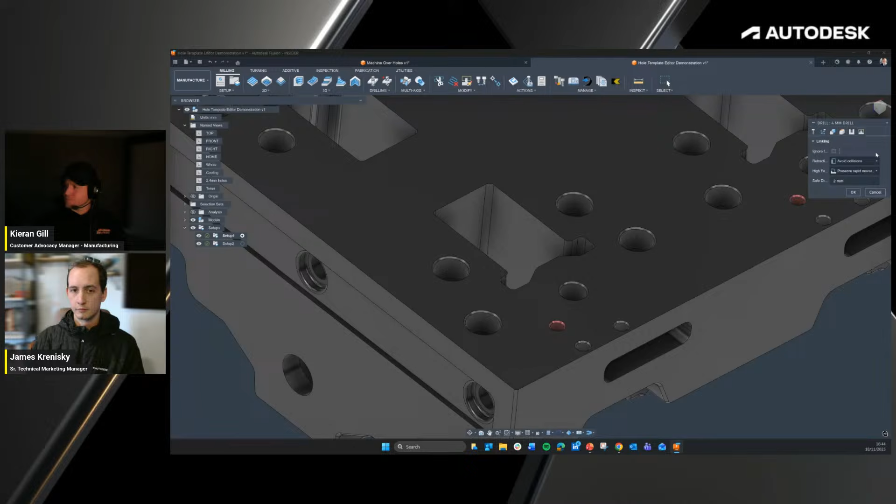Okay, once you've selected the right tool, you can also go and rename operations as well. So for example, I know that this is now the 2.4mm drill instead of the 4mm drill. I can go ahead and change all the rest of them. I'm not going to do so. We're going to go ahead and click on OK. And when we now run our hole recognition, what we should see is all 32 of those holes colored pink, but also our 5.38mm hole colored in cyan.

Now, as we look at these additional 2.4 millimeter cooling holes or sprue bush channel holes, it doesn't matter what they are. What you can see is there's three key things here to be aware of. One is that we have a very specific color applied to a bit of hole geometry. And what we want the templates to do is identify that color and use that color as an additional scrutinization method for picking a template. So if it's red and it's the same size as every other, but it's red, then use this specific template.

Again, we've got two other holes. Now, they may be the same size. They may be different sizes. One might be through into this slot. One might be blind. So we need to figure out quickly how to do this. And let me quickly show you how to do this.

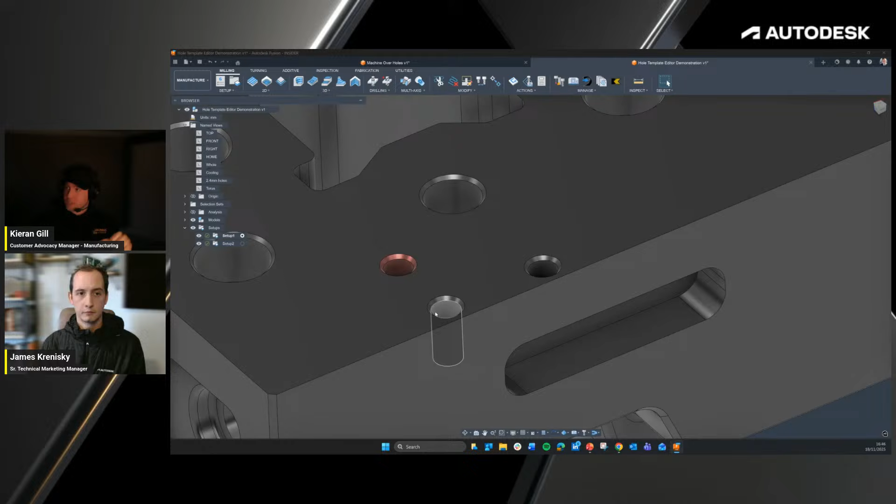So the first thing we're going to do is quickly create some dummy toolpaths. So we'll simply go into our toolpaths. We will simply ignore everything. We will pick out our red 2.4 millimeter hole. We'll simply drill and countersink it. Create two toolpaths for this. Once those toolpaths are created, I'm just going to simply go ahead and say store as a hole template.

Okay, so the next thing we do is give it a quick name. So let's say 2.4 millimeter. It's a blind hole. It is going to be an M3 tap, and it is going to be red. We'll give that the description. Again, because it's a red color, let's equally give it a red color as such. Now I'm going to up the priority to something like 10, for example.

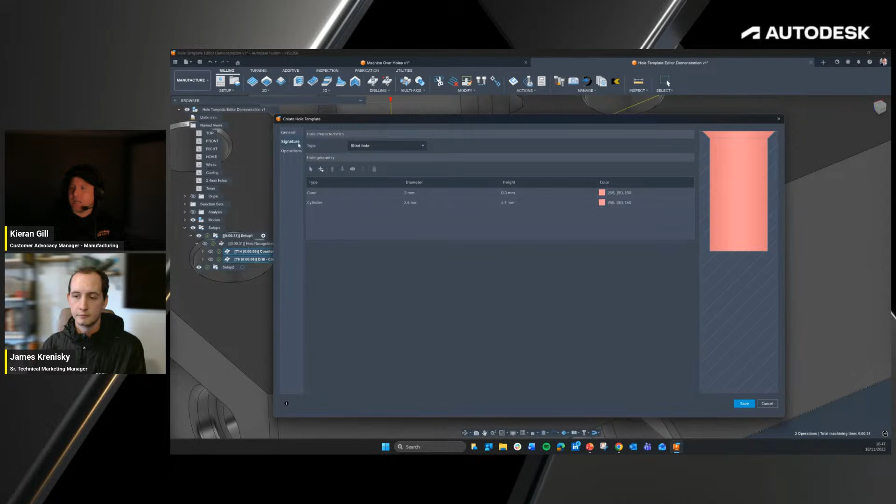And let's quickly have a look at the signature. This is the important bit here. Notice how the signatures themselves have consumed the colors from the actual signature of the hole itself from the CAD file. So that's really important to bear in mind. And then our toolpaths have been created for us. So we can go ahead and save that toolpath now.

Okay, and then what I'm going to do is simply delete my hole recognition again. Let's just double check this, go back into hole recognition, and we should see 32 pink, a cyan, and a red color. Now, this is really easy to complete, essentially the last two, because what we can do now is go into our template library,

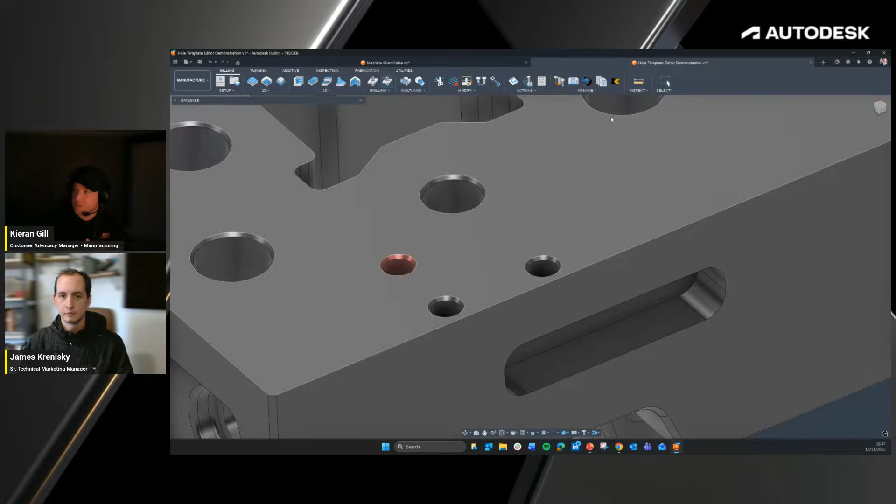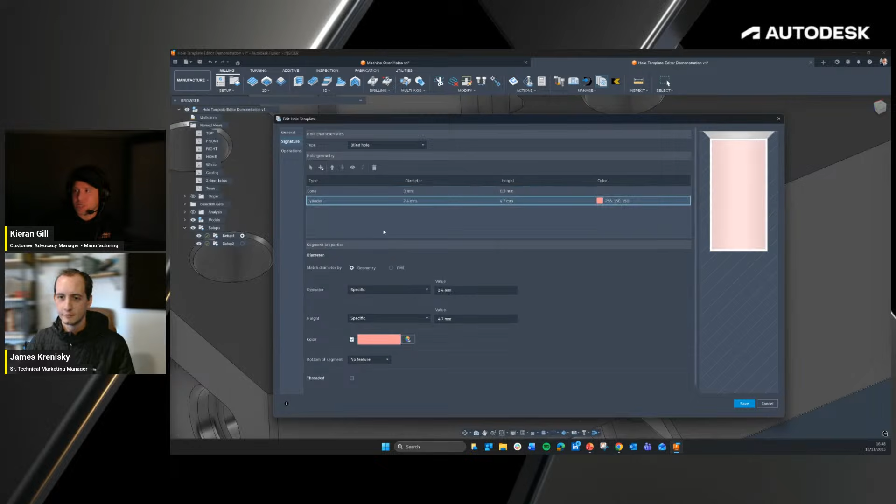and we can go to our red hole, and we can simply go ahead and duplicate that. What we're going to do now is say this is actually going to be a blind hole, but the signature itself now does not need to be additionally scrutinized with the red color. We can simply remove the red as well and call it a blind hole.

And let's just change the color in this instance to something like orange, for example. And let's up our priority to something like 50. Okay, so in this case, what we should see now is, again, if we go into hole recognition, we should in theory see a red colored hole for either a sprue bush or water channel of specific use. We should see our blind hole in orange.

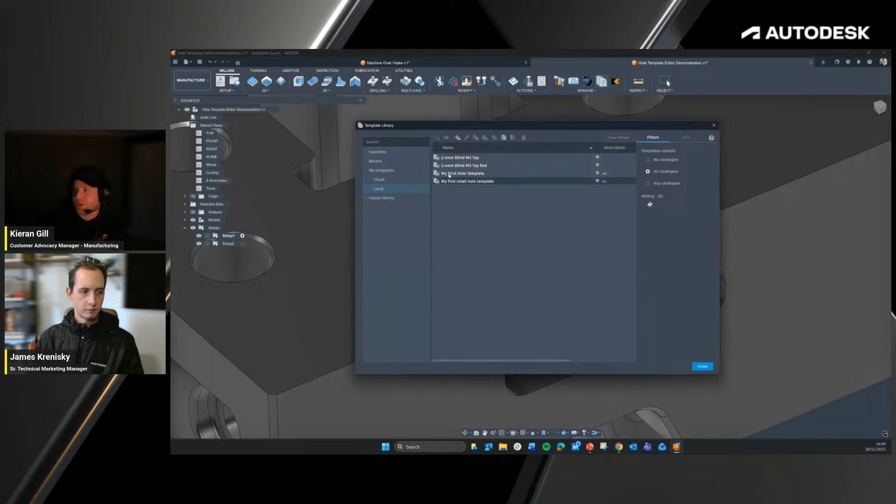And last but not least, let's just duplicate that very quickly, because I know we are on time. And because we're in the habit of traffic light colors, let's just call that a green color. And in this case, this is going to be a through hole to denote it goes through into that slot. We'll click on save, click close.

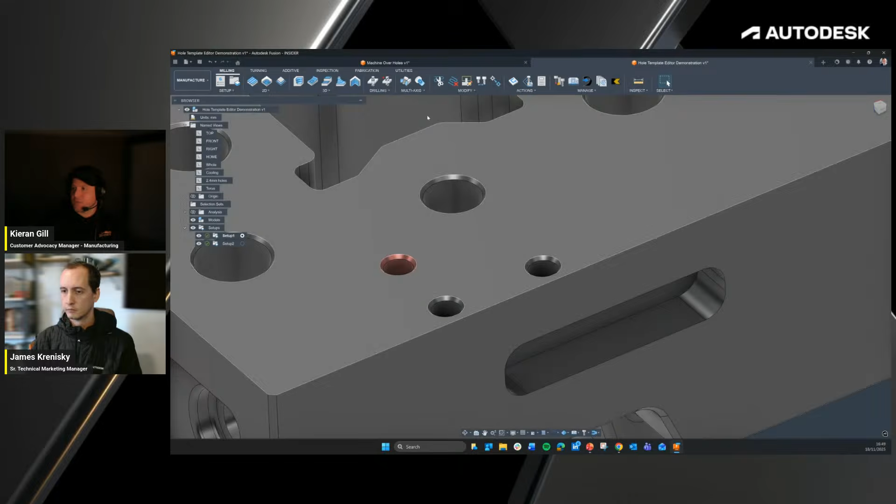And for example, in this case, we will just go ahead and highlight hole recognition, run hole recognition. And we should in theory see now, if I just click here, that we have all of our holes correctly identified, all associated with relevant templates, and our red, yellow, and green traffic light 2.4 millimeter cooling channel holes as well, correctly identified.

So with that, let's jump straight back into the presentation just to finish off for 2 seconds, and then I'll hand you back over to James. Let's go there and share. So let me know when you can see my screen finally.

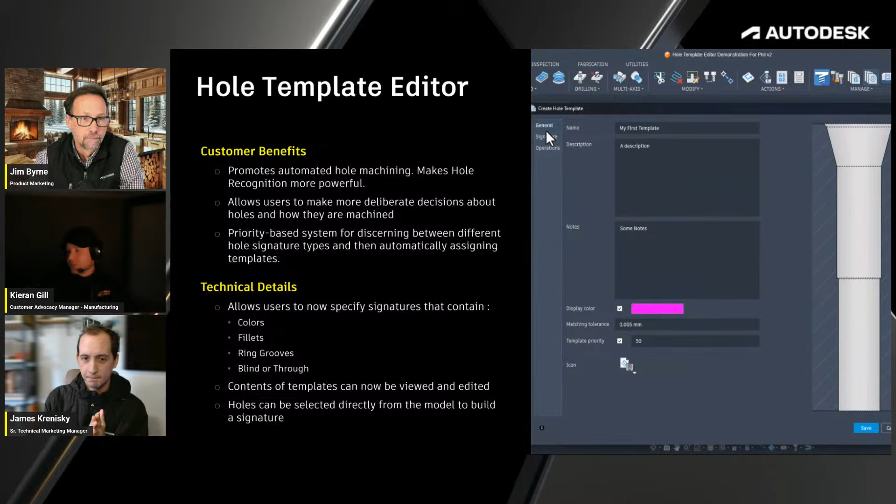So that's the hole template editor in a very quick nutshell. Hopefully that was very useful for everyone to see that deep dive tutorial on that. And with that, that's all from the manufacturing side. I'll now hand you back over to James.

Thanks so much, Kieran. That was super informative for someone that doesn't spend much time in the manufacturing environment. Really cool updates there. I just wanted to put this slide back in the end just to reiterate the overall goals of this release. So we really focus on the consumer product design side and multi-axis machining, and then multidisciplinary collaboration.

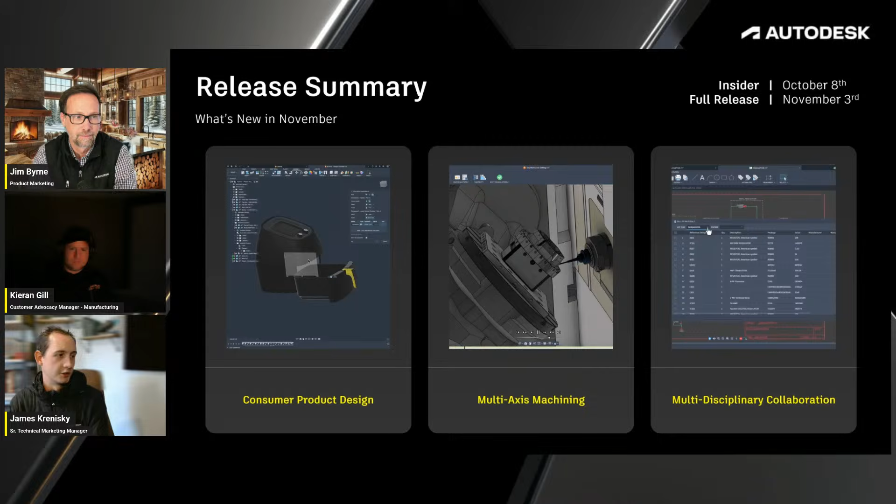Okay. So I'm going to give James and Kieran a little bit of time to look over the comments that have come through. There's a few questions in there. By the way, Kieran, it looks like it's getting a little bit darker over there. You're in the UK. Yes, but I'm a little bit far from the light switch to turn it on. So yes, it has become quite dark. And it's good for everyone to know that those of you that are watching, you're across the globe. It's good to see everyone here. I see people in just about every country across the world. So it's really great to have everyone here.